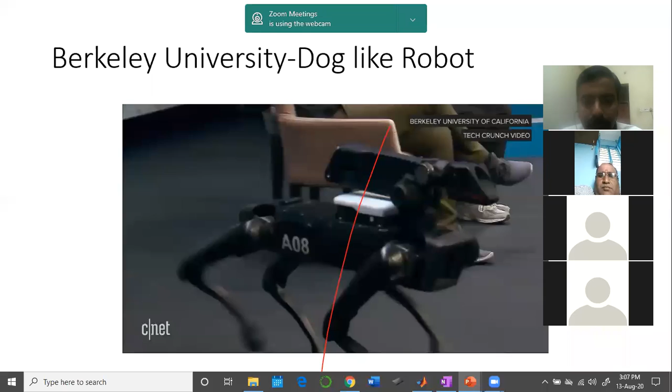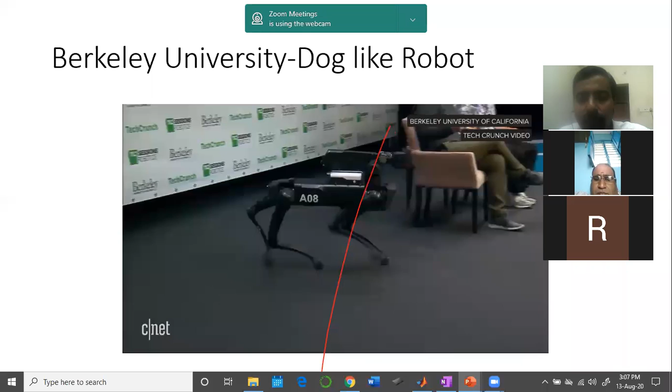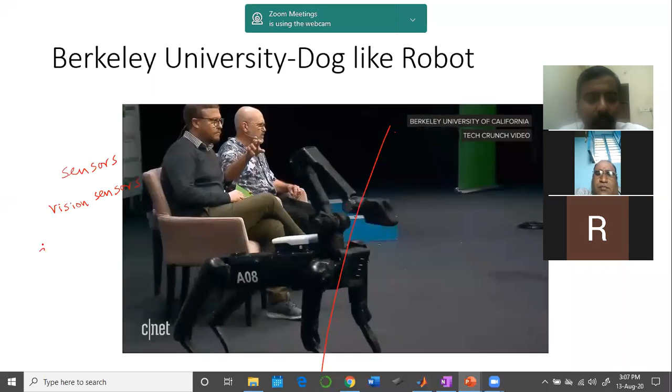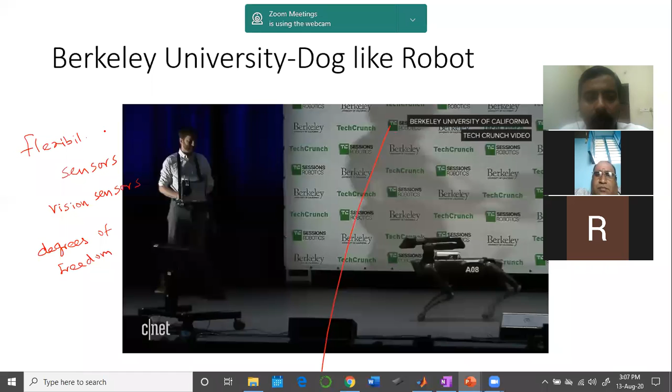If you look at this robot, it's not an easy thing to develop this kind of robot. The robot is equipped with all kinds of sensors, particularly vision sensors. And look at the kind of arm movement, the degrees of freedom in the sense of arm movement, and the flexibility with which the robot moves. You can see there are a lot of hardware elements involved in this movement, link-like mechanical arrangements and mechanisms.

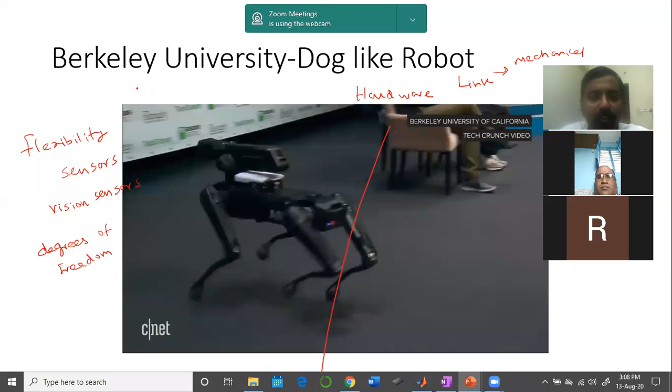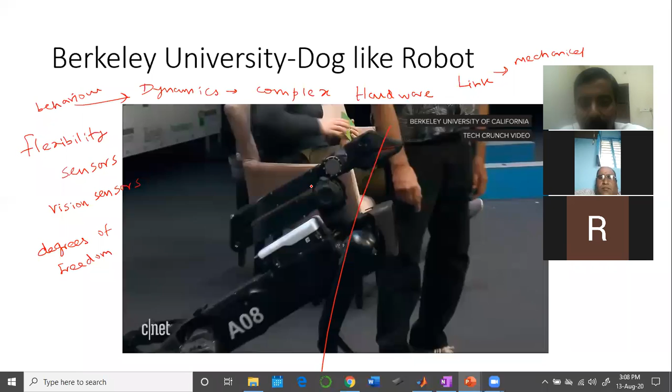A thorough understanding of the dynamics of this kind of system is quite complex. What is dynamics? If you want to study the behavior of this kind of robot, you need to mathematically model all this. There are mechanical elements involved, electrical elements involved, and electronic components involved.

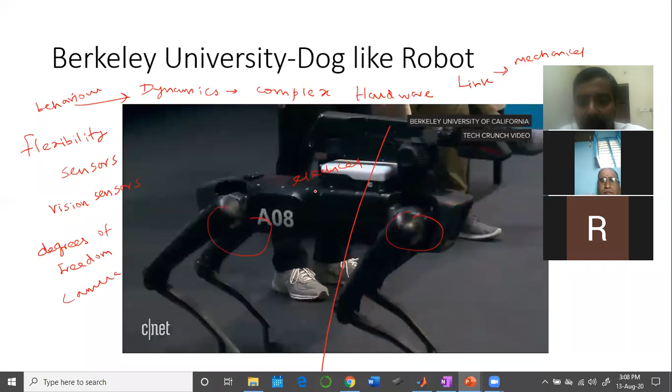There are vision sensors, cameras involved here. You can see he is projecting the camera there. There is a camera at the rear end, and at the front end there is a camera, and you can also see a lot of other mechanical mechanisms, including the leg movement.

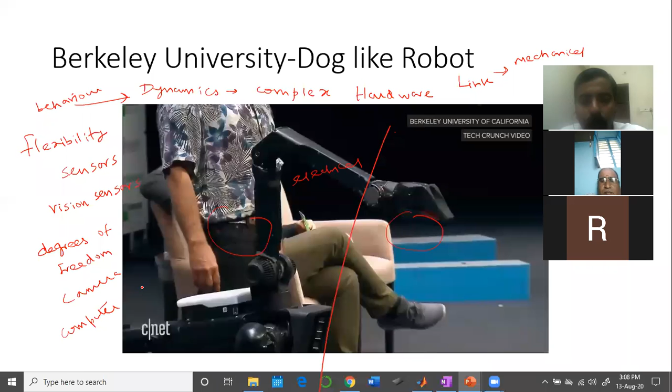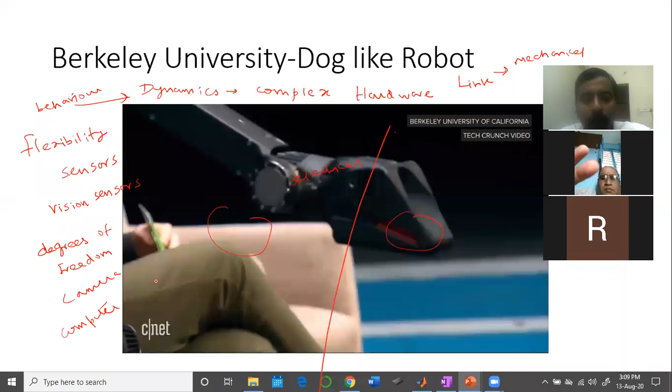So everything has to be programmed in a computer. You need to write appropriate algorithms for the robot to obey your commands. It's quite interesting to see how the robot maneuvers like a human hand. This robot can move its hand, its legs, and its entire body. Here you can see the arm movement, they call it the end effector. End effector means the robot is going to interact with the environment using this particular part. These are all things you need to imagine the kind of complexity involved. All this has to be visualized.

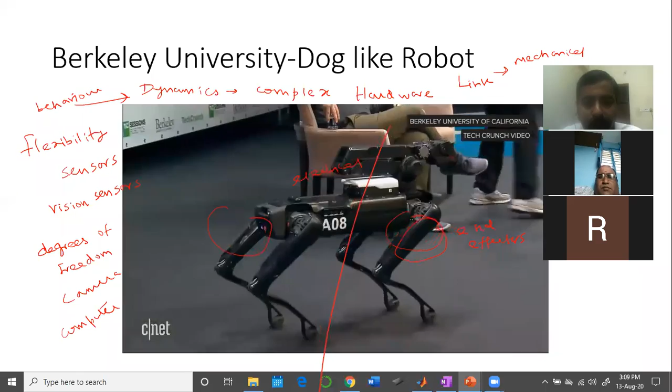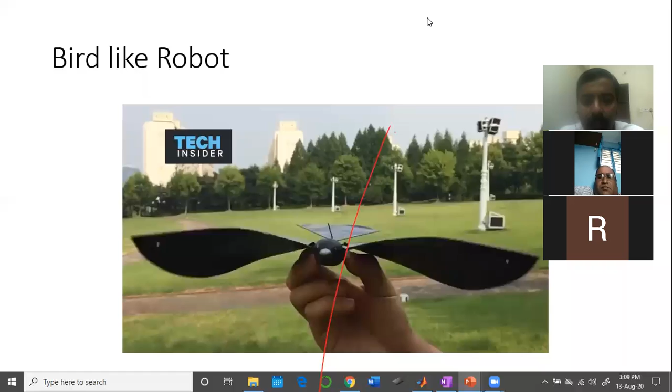Now let us move ahead. Look at this kind of robot. This is another kind of robot, a bird-like robot. It is basically a drone, a flying robot.

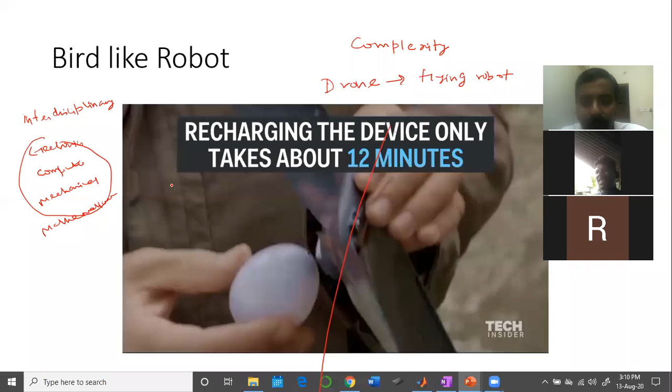The technological complexity involved in building this kind of robot is not so easy. There are a lot of interdisciplinary domains involved, people from electronics, engineers, computer science, mechanical engineers, and mathematicians. All these people are involved in developing this kind of technology. It's quite an interesting problem. The control part, particularly controlling this kind of robot, is a highly challenging job, particularly stabilizing it. Stability of this robot is quite important, so think about that.

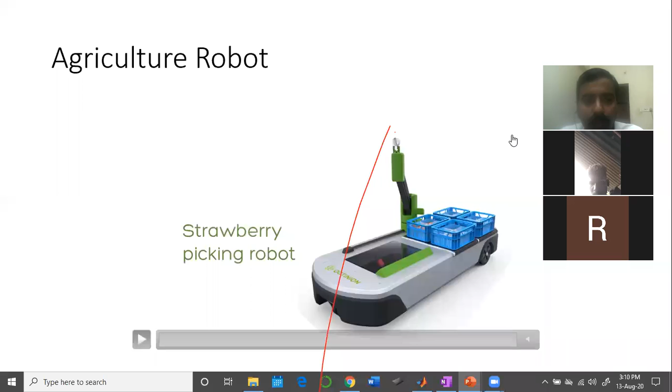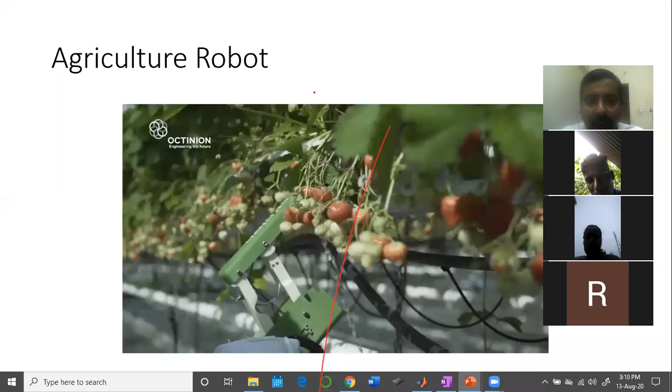Look at this kind of robot here. This is a strawberry picking robot. The robot can pick strawberries. Let me project it to you. Look, this is called the end effector, the portion which interacts with the environment. This is the portion I'm talking about, interacting with the environment.

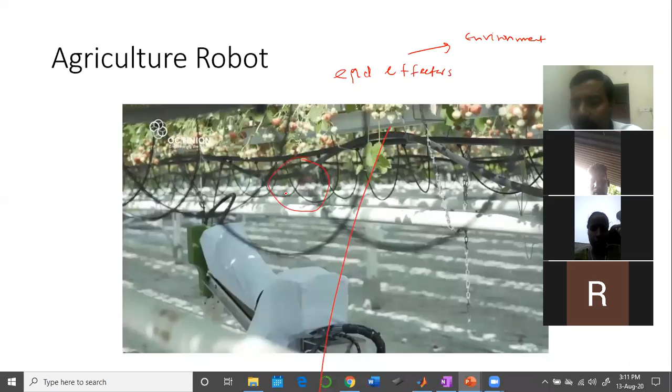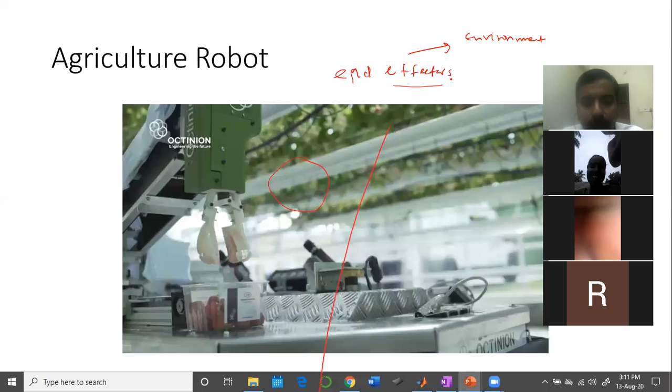So the end effector needs to interact with the environment. That's how it works.

If you look at this kind of AI impact, scientists throughout the world are predicting there will be a huge impact of these AI technologies over the economic, cultural, social, and other domains. It's going to have a huge disruption. Understanding and mastering this technology will definitely help all the members involved. In fact, engineering college faculty members working in this domain have a bright future ahead.

If you work out, understand, and master this kind of technology, you will be wanted everywhere, and you can take classes for others as well as do research in this domain. I am expecting few faculty members of this group to take up this kind of research challenges and come up with good results. The rise of the robots has been predicted heavily - Martin Ford wrote a book called Rise of the Robots. This rise is going to have a huge impact on society in the near future, and society has to be ready to face these kind of tech challenges. So we need to prepare our students. Faculty members have to be equipped with this kind of knowledge to face these challenges in this technological domain.

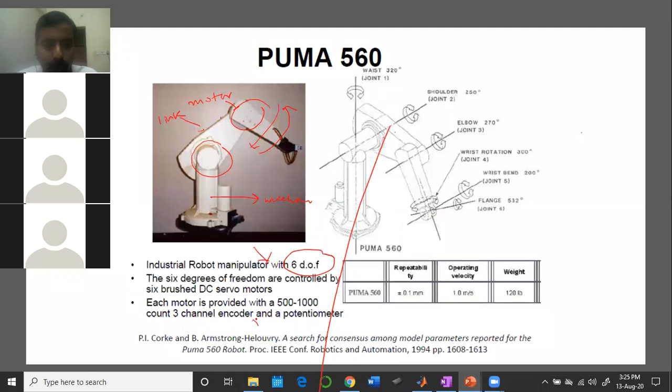There's a 3-channel encoder and a potentiometer for it. So these are the key technologies behind robots — you call it direct and inverse kinematics.

In the case of inverse kinematics, look at my arm — if my end effector position is known, then what are all the angles I require to reach that final position? If I'm going to study that, then I call that one inverse kinematics — knowing the end effector position, knowing this position. For example, I would like to go and pluck some fruit in the tree. Imagine this is a tree.

I would like to go and pluck that fruit — so I know this position. What are all the angles I require to go and reach that point? That you call the inverse kinematics.

And then if the angles are provided for all the joints, then what is the end effector position — how do you compute that? That you call direct kinematics. So the joint angles are given, and you want to compute the end effector position — that is direct kinematics. And inverse kinematics is when you need to compute the joint angles for the given end effector position.

End effector, what I really mean is the fingers — I'm talking about my hand's fingers, where it is located, in order to perform some operation. It may be welding, or it may be spraying some paint, or it may be any kind of operation.

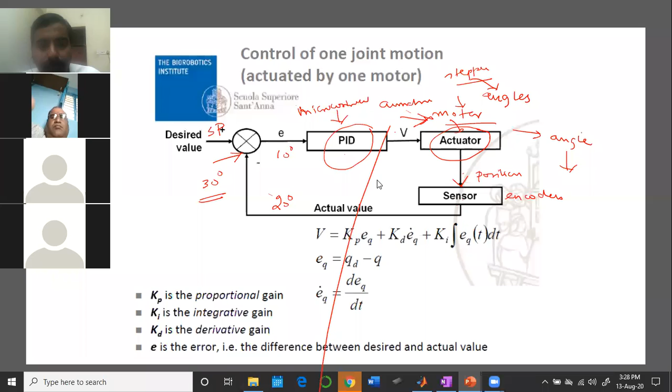How can I do that? How can I achieve this? Because the robot is blind, we equip the robot with sensors. Equip the robot with sensors. But the problem is all these sensors are prone to errors. It may be a camera or it may be a laser rangefinder.

The robot sees the environment with the help of these kinds of sensors, and initially it will assume it is somewhere, I am in position some X. The robot can assume that with the help of the perception, with the help of the sensors. Now the robot starts moving. Now the problem is, if there is some initial error in the sensing data...

What happens? The initial sensing error gets accumulated over a period of time. So over a period of time, the robot may lose its track and go somewhere. The intended path is like this, but it may go somewhere, primarily because the error starts integrating - integrating in the sense summed, it gets summed up. So you need to somehow correct this. That's where the robot localization problem comes.